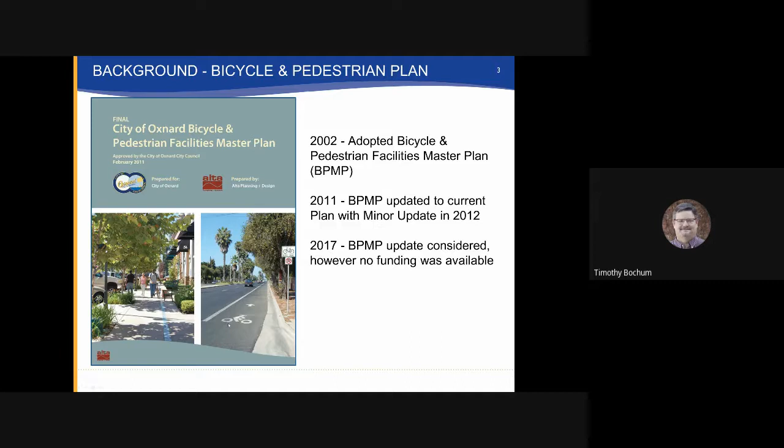The plan itself establishes a rather large objective. Here is the major goal as outlined in the plan, and that quite simply is to make bicycle and walking integral modes of our transportation system here within the city, and really do that through a safe, interconnected system of bicycle and pedestrian facilities throughout.

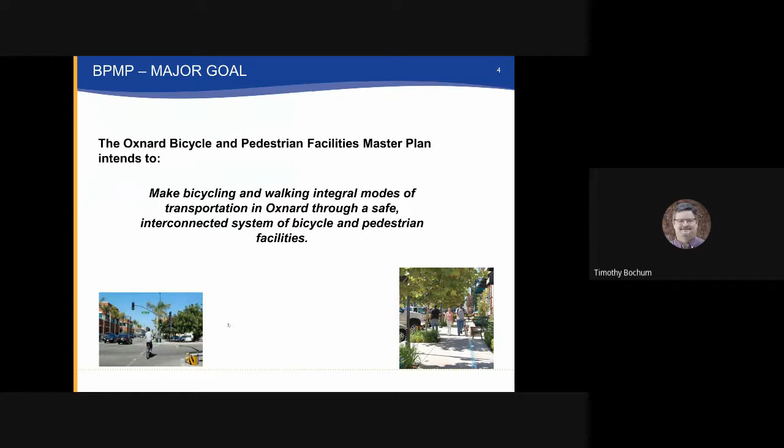How would we do that? Well, the plan does establish the following objectives. I won't read these verbatim, but I have highlighted some of the more important concepts in the objectives. Improve and expand pedestrian and bicycle facilities, generally through focusing on improved connectivity within the city. Provide more direct connections between major activity centers, such as employment and retail areas.

Improve bicycle and pedestrian access and safety. That's obviously a very important objective and goal that we need to continue to strive for. An interesting objective is to adjust our culture to recognize that bicycle and pedestrian facilities aren't just recreational facilities, aren't recreationally oriented. They need to become integral parts of our transportation system per se, and that really does mean integrating them into our street system as best we can. We'll talk a little bit about that.

And then finally, a major effort to increase our bike and pedestrian mode share for greenhouse gas emission, climate action plan advancement, as well as sustainability.

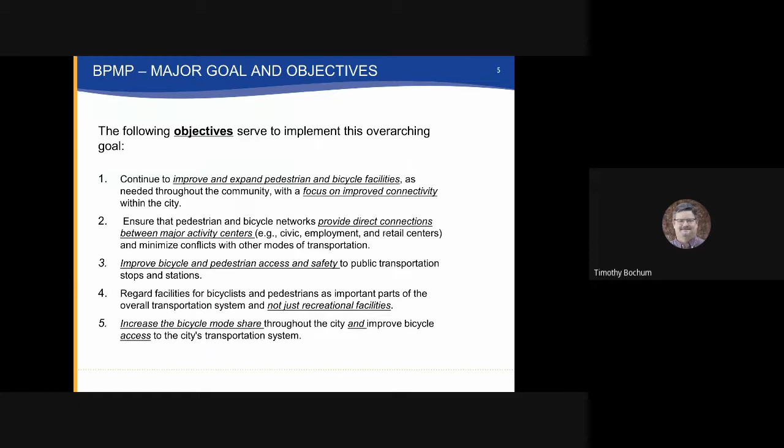Just wanted to spend a short period of time on nomenclature that you will hear in the presentation. There are various ways that we refer to various bicycle facilities. Class 1 is commonly referred to as a separate path of travel for bikes, possibly including pedestrians in a mixed-use type of path setting. They are entirely separated from roadways.

They may be along a roadway, but they're not within the roadway, giving a fully separated facility for usage by bikes and peds. Class 2 facilities, commonly referred to as bicycle lanes, use markings in a street roadway in order to establish clear areas where a bicycle should be separated from vehicles that are traveling in the vehicle right of way or parked along a street, and those are commonly referred to as bike lanes.

Class 3s are what are commonly called bicycle routes or boulevards. These are really corridors that connect various areas throughout the city that roadways may not be wide enough to provide a specific marked and separated area within the road, or enough right-of-way or public property in order to do a Class 1 facility. So we install signage and sometimes street markings in there to really connect these areas through routes and shared facilities as shown.

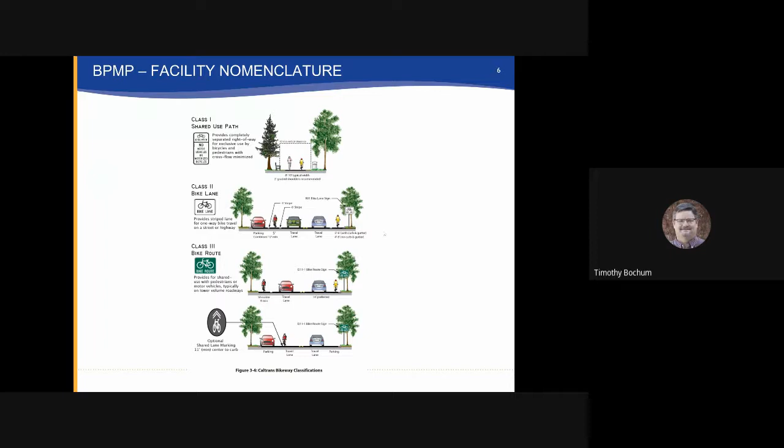The master plan also contains other elements besides just projects. Appendix A is a rather important piece of the document and includes significant design guidelines for use by city staff and others when we look at how to implement and design our bike and pedestrian facilities.

There are just two examples of those design guidelines. On the left, you'll see some examples of how to create those bicycle lanes, those Class 2 facilities. You can see in the middle that it's providing specific space for bicycle ridership, separating out parking vehicles and through traffic, giving them really defined space to make it safe.

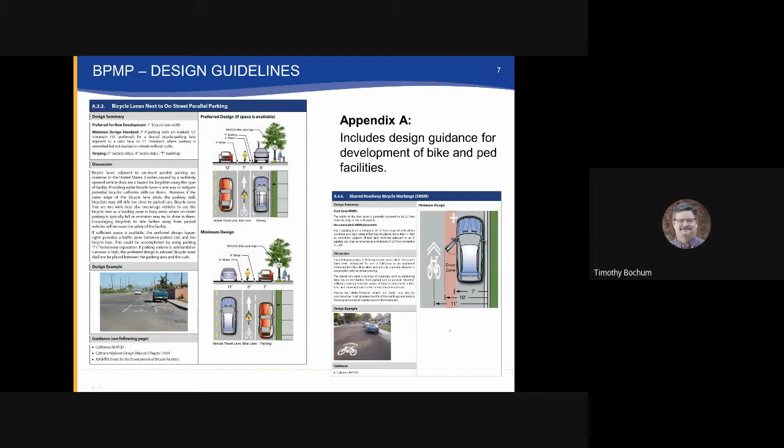On the right, a concept of sharing the road where it may not be wide enough to put those lanes in, using sharrows or other techniques to let bicyclists know where they should be, and vehicle drivers know there could be bicycles along the corridor, avoiding safety issues such as the door zone, where a parker may be opening their door and an unsuspecting bicyclist may come into conflict.

You couldn't have a bicycle master plan without having projects, and our plan certainly has those. We have approximately 110 linear miles identified in that plan. You can see in the lower left the legend identifies both existing and proposed facilities for each of those classes, Class 1 through 3.

And whether they're solid or dashed indicates if they were in existence or proposed at the time. On the right, you'll see how it lays out, fairly equal in linear miles between the facilities. The one thing I'd comment on is many of the Class 1 paths, even though significant in miles, require significant effort to install, whereas the Class 2 bike lanes are often within existing streets and much easier and more affordable to put in.

I'll give you some examples of how we do that. All of these projects, the plan looks to prioritize based on various factors such as points of interest, schools, barriers to connectivity, shopping, and gives a listing of those priorities for consideration by the council for funding and programming.

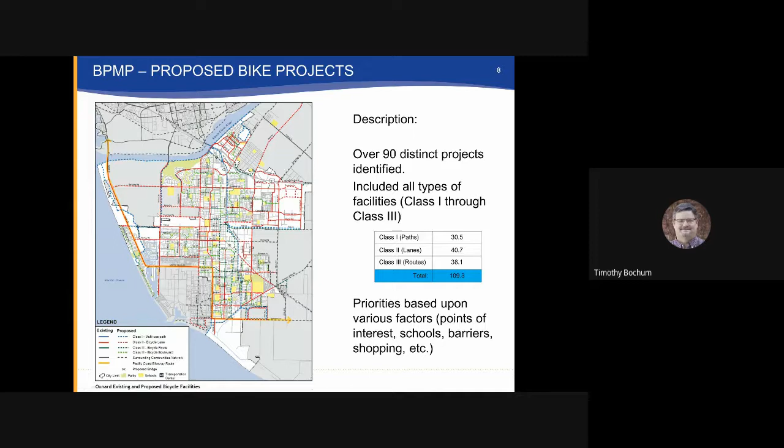Here is an example of one of the projects, pulled right from the plan. It's regarding bicycle improvements along C Street. I chose this one because we just recently completed much of these improvements. This is just one segment of the work that we did.

The plan really tried to anticipate what was necessary to improve the corridor as a complete street, a multimodal street. You can see in the upper right, their recommendations at the time were to look at shared lane markings in areas, get better route signage, bicycle signal detection, upgrading our vehicle detection to video, those type of things. Down on the left was just a concept.

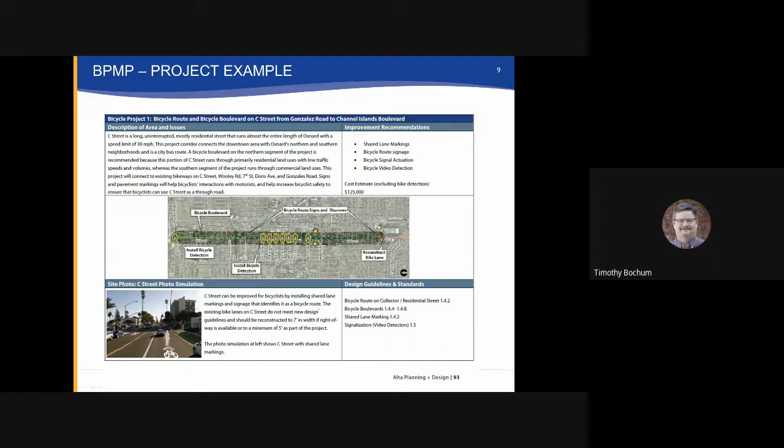Ultimately, through additional design efforts, C Street is a mixture of Class 1, Class 2, and Class 3 facilities, and it was recently completed last month—approximately 5 miles of improvements.

Victoria Avenue, the Class 1 facility completed north of Gonzales to allow access up to the Gumtree area. The Class 2 facility on Victoria that basically connected Gonzales down to Teal Club to the existing bicycle route lanes that were there, a significant corridor improvement along a major gateway to the city.

We also had other more recent projects that included bicycle facility and pedestrian facility updates. Most of these projects were related to street resurfacing projects underway or private development projects that may be coming forward.

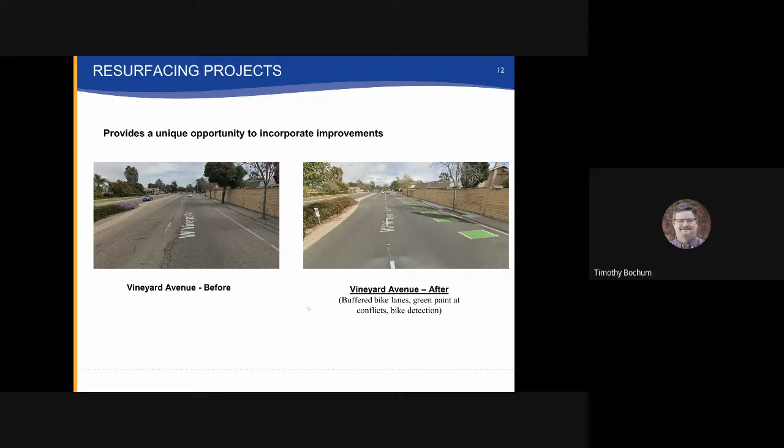Similarly, at that time on Patterson, we did a paving project. On the left, prior to our work, there were really no bike facilities on the road. We actually had signage in some areas encouraging bicyclists to get onto the sidewalk, separated from pedestrians, mostly because bicyclists didn't feel comfortable riding along the street. Post conditions, we installed full Class 2 bicycle lanes along these segments, and installed buffered areas to create separation between vehicles and bicycles, giving them specific space to operate safely along the corridor.

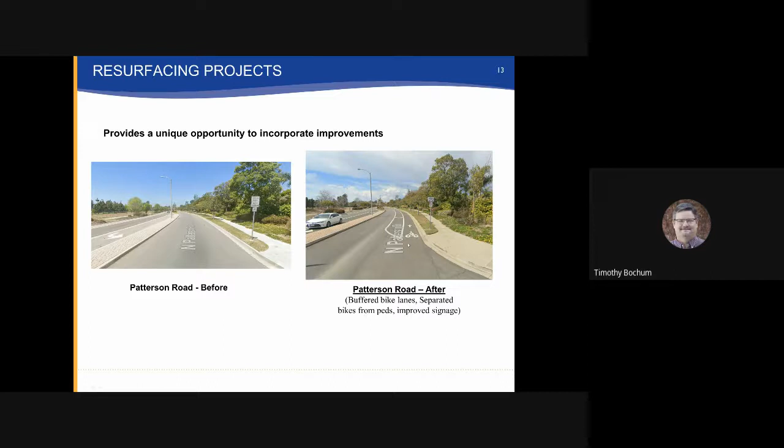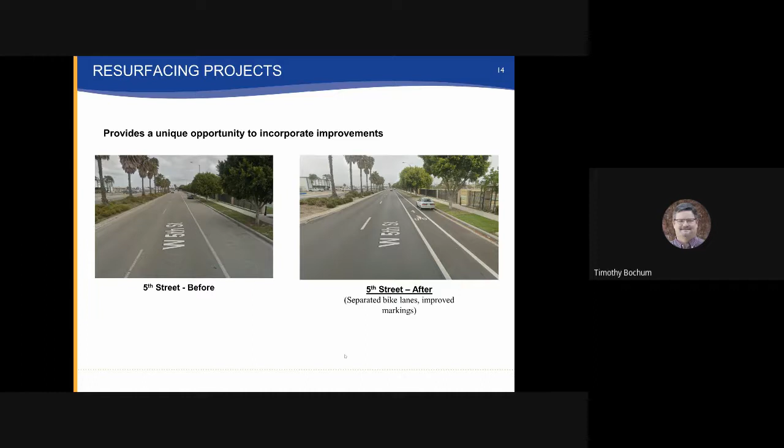One final example of how simple an upgrade can be: this is a paving project on 5th Street, looking eastbound. You can see we did have bike lanes prior, so there were areas for them to ride along the street. However, when we paved, we created additional lines to push parked cars up against the curb, giving bikes more defined space, and increased the markings to show both motorists and bicyclists where they should be to improve safety and guidance.

We obviously have a lot of projects and programs on the way. So this next part of the presentation will talk about some of the significant work that we have going on. Just a lot of work.

One of the most significant things is the recent passage of Measure E, with the council and community's investment into infrastructure improvements allowing us the opportunity to include bicycle and pedestrian improvements as part of our resurfacing and other projects. I'll talk a little bit about that.

We've been soliciting and receiving significant grant funds for other efforts, and we'll talk a little bit about those. Parallel efforts staff are working on include improving signal timings along specific corridors to improve bicycle and pedestrian safety. Then there are three major planning efforts I'll cover: the bicycle and pedestrian master plan update, our local roadway safety plan development, and our sustainable transportation plan.

This table, table 3 of your staff report, identifies some of the major resurfacing projects taking place in 2022, next calendar year. All of these facilities give us the opportunity to review them and incorporate the design features I showed in previous slides, looking at better complete streets integration, upgrading vehicle detection, bicycle detection, and similar features.

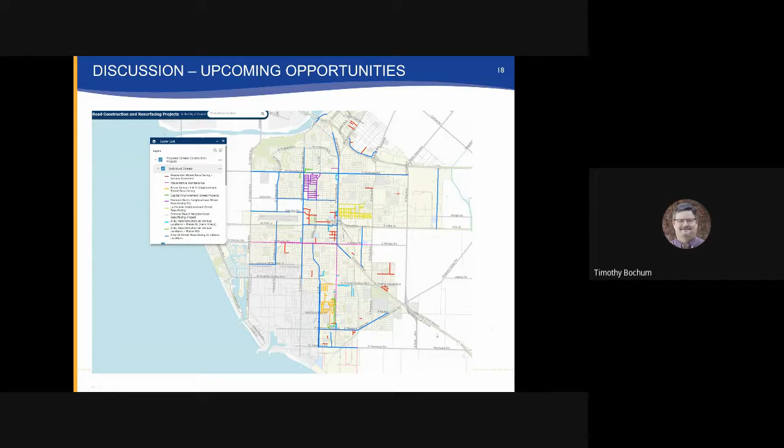I wanted to pick one example to give you an idea of what we're currently considering. Patterson Road, south of Woolley and south of 5th Street, is scheduled for resurfacing. As part of that, south of the roundabout, which is a single lane roundabout, we actually have 4 lanes of traffic. This roadway is the subject of significant complaints about speeding and pedestrian crossing issues. So we're considering making changes to make it a more complete street project, potentially by converting the 2nd lane to a buffered, separated bicycle facility.

The volumes along Patterson are such that we don't have a capacity issue out there, so we would be looking at a better way to utilize the large amount of asphalt we have. Then at intersections along that corridor, such as here at Oarfish, which has quite a few complaints, we'd get better channelization, allowing bicycle safe passage, better visibility from side streets, more defined passive travel, and other elements to implement the bicycle master plan.

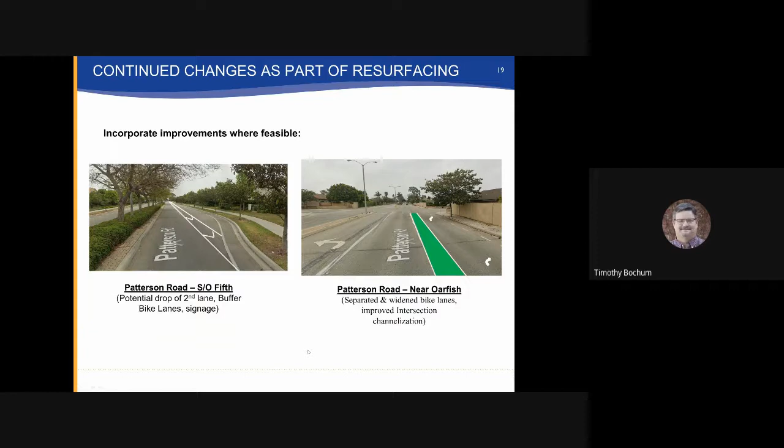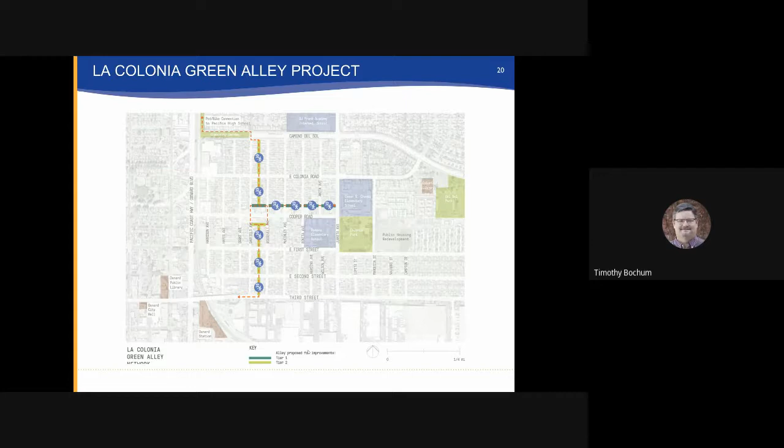A very exciting project starting construction is the La Colonia Green Alley project. This is our first green alley project of the Green Alley Master Plan, and it looks to make improvements along facilities connecting Cesar Chavez Ramona Elementary School to various areas of the neighborhood, by making modifications in the alleys and adjacent street system to clearly define and separate out some of the uses.

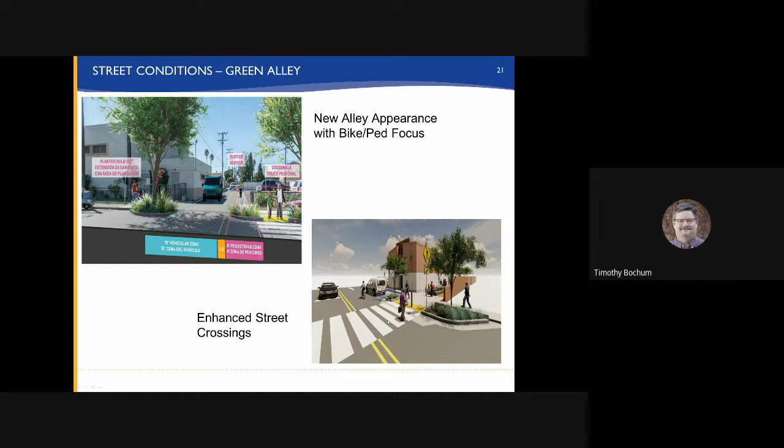These are concept figures from the Green Alley Master Plan. You can see that in each of the alleys, the concept is to separate out clear walking areas, biking and driving areas, and when we cross streets, to give better traffic calming features and enhancements for better passage for bikes and pedestrians.

This is just one example of that project - the alley that parallels Cooper, connecting Cesar Chavez here to the right into the neighborhood. As part of the project going to construction, we'll be resurfacing the alley, creating a new smooth surface, giving bicycles and cars their own one-way travel area, and area for pedestrian passage, including bulb outs and crosswalks to cross the streets.

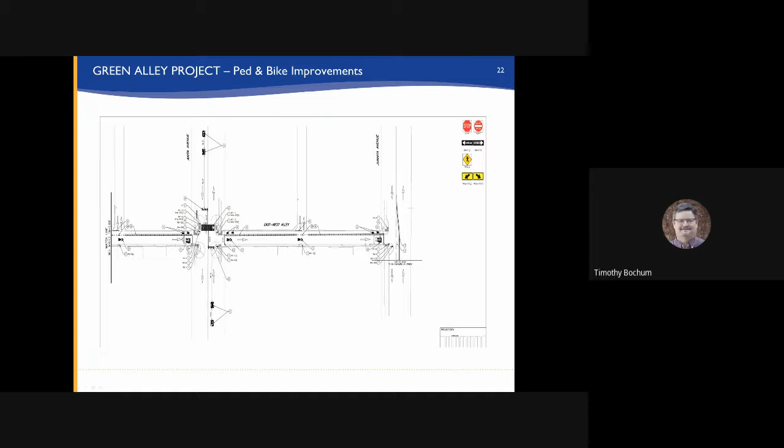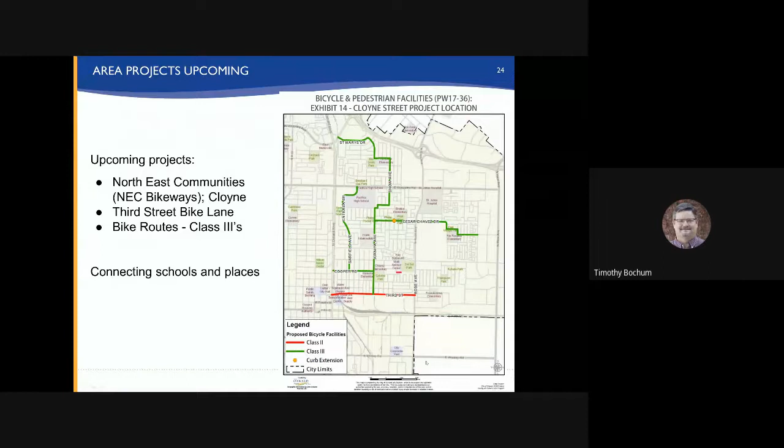One of the big ones is the Northeast Area Community Bikeway and Pedestrian Project. This figure shows how we will be utilizing bicycle routes and lanes to connect areas of the neighborhood of La Colonia and to the north. The green areas are bike routes that will be conducted through those areas, and the red is Class 2. This project is currently under design and scheduled to go to construction in 2023. As part of that, we are looking to upgrade Cooper Road.

We're making major investments in establishing a Class 2 facility from Oxnard Boulevard all the way over to Juanita. This project has received grant funding for the bicycle and pedestrian improvements, but relies on our resurfacing funding to resurface the roadway, get it smooth, and complete the improvements. This project is scheduled to be completed next year when the water project is completed.

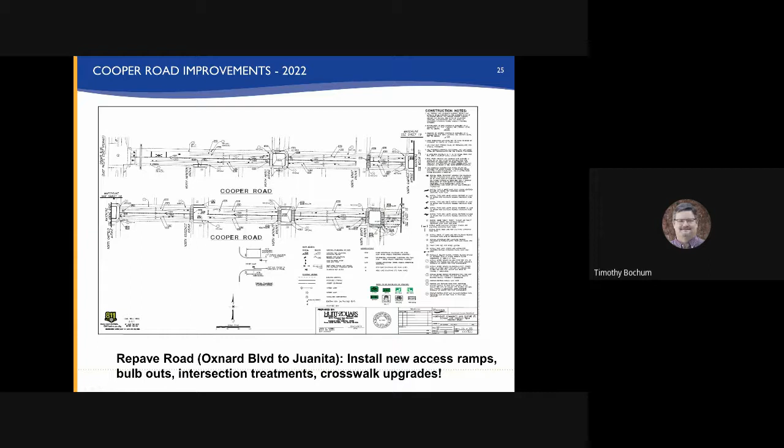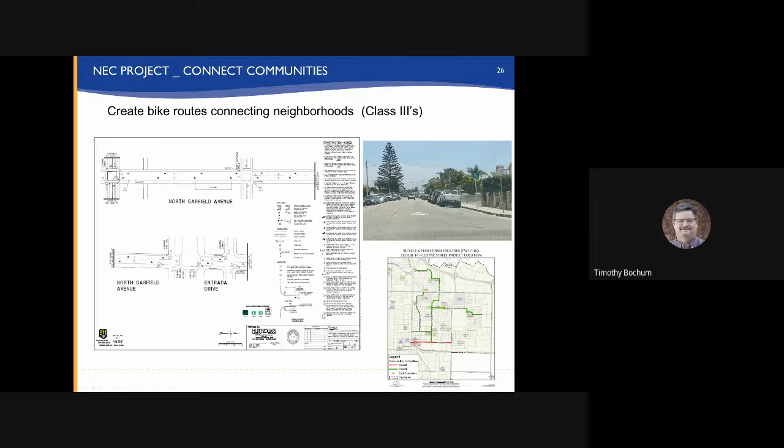A pretty big investment in trying to accomplish connectivity is looking at opportunities along 3rd Street. As you can see in the current picture, the way we currently have the area striped, we have in some sections 4 lanes of travel, in some sections 3, but currently no ability to put in bicycle lanes out there. We're looking at modifying that to get a better bicycle connection between downtown and Rose Avenue.

This is really the concept we are developing - not yet complete, but we would look at establishing buffered bike lanes up and over the 3rd Street Bridge, continuing through the neighborhood past the warehouse plants. We would have Class 2 bicycle lanes the entire section, then a mixture of 1 lane in each direction with a turn pocket, and widen the road to 2 lanes in each direction as we get closer to Rice.

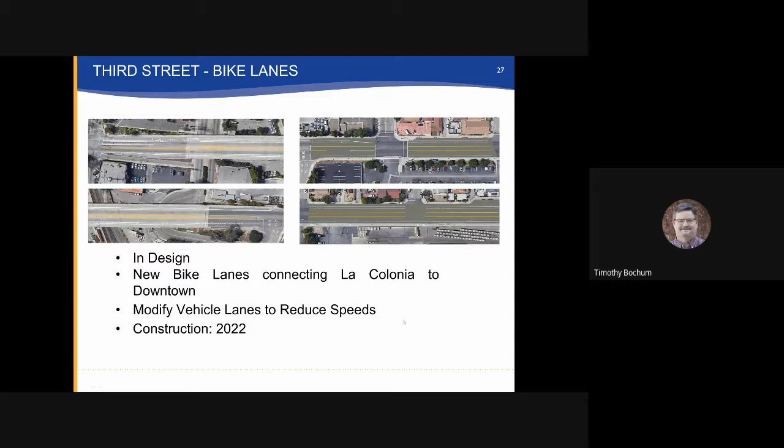A very significant award that we got recently was about $2 million, just under $2 million, for Safe Routes to School improvements. This is very exciting. It's one of the first major grants that we've gotten to really focus on our school issues. As part of that, we received funding for developing 26 plans for 26 schools.

That's by developing a plan where it clearly demarks where they should be walking and riding, and then making changes in the infrastructure to upgrade crosswalks, signage, markings, those type of things, and then promote those with school children.

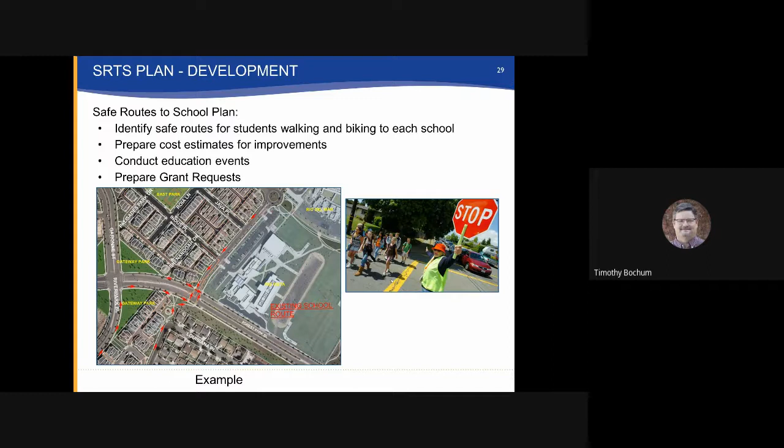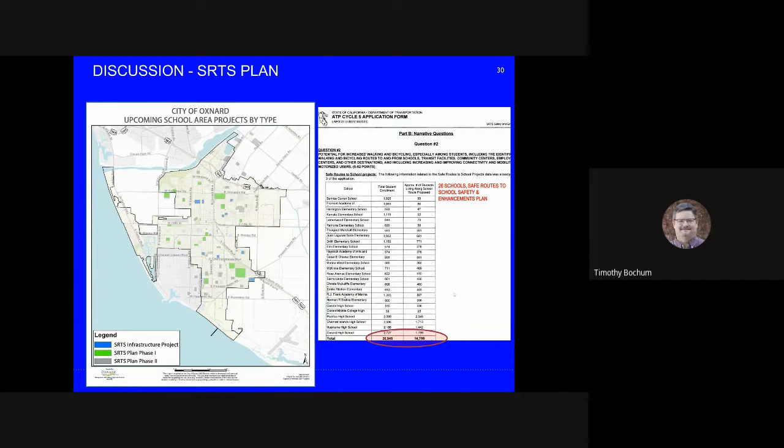One example, Ramona and Cesar Chavez. This is a concept plan that was submitted for the grant and received award. It looked at not only upgrading the traffic control along there, but also doing bulb outs and new handicap ramps, and installing rapid flashing beacons for assistance.

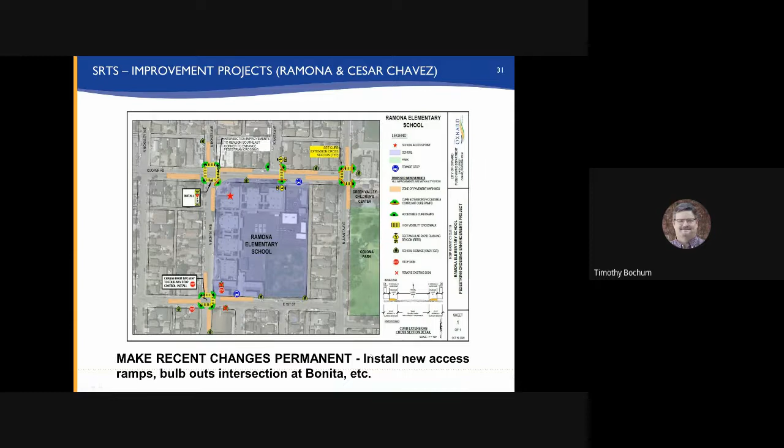This project has been funded, and it has really been funded to make permanent some of the more recent work that we just completed this summer. A shout out to our Public Works street staff who was able to complete this work.

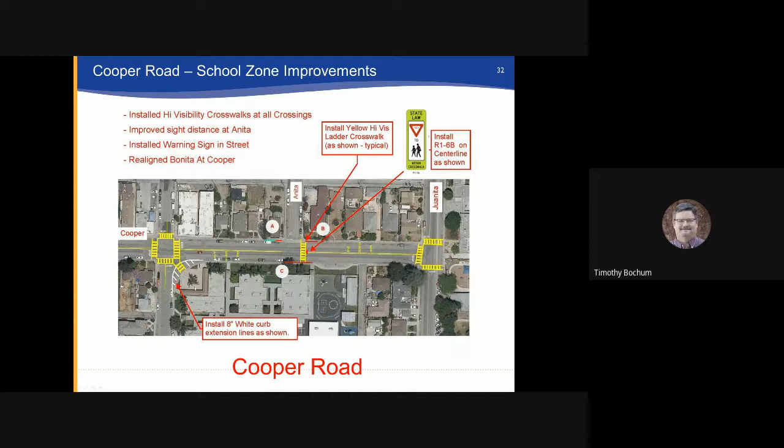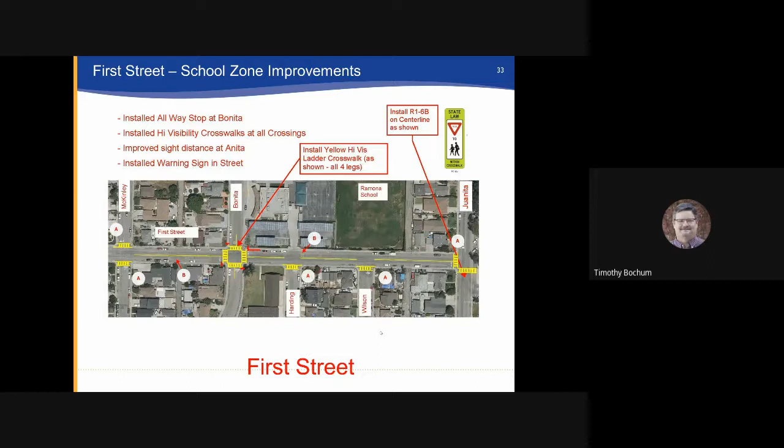We upgraded all of the crosswalks surrounding Ramona School to high visibility crosswalks, installed additional signage within the roadway, additional striping and channelization to square up the intersection. Similarly on First Street, we installed a four-way stop at that location and really demarked the corridors to and from the school. The grant project will make all that permanent and put in more permanent facilities. That is scheduled to be under design and delivered in 2022.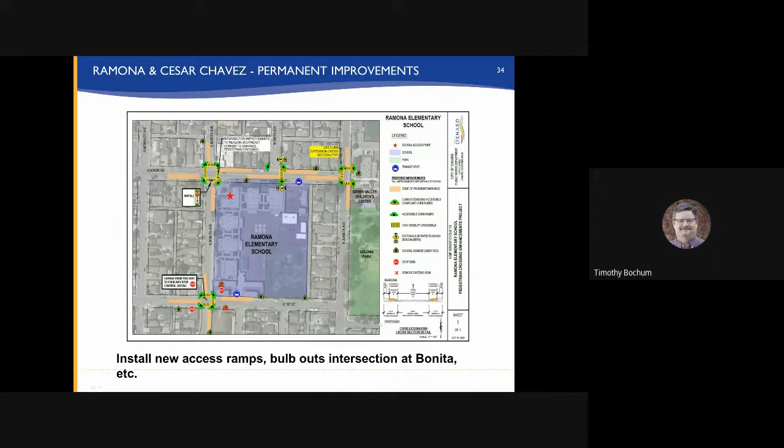4 other schools may be of interest as part of that grant: Harrington Elementary, Kamala, Lemonwood Elementary, all received funding for construction, plan development and construction, as well as Fremont Middle School. Those will all be moving forward in the next year.

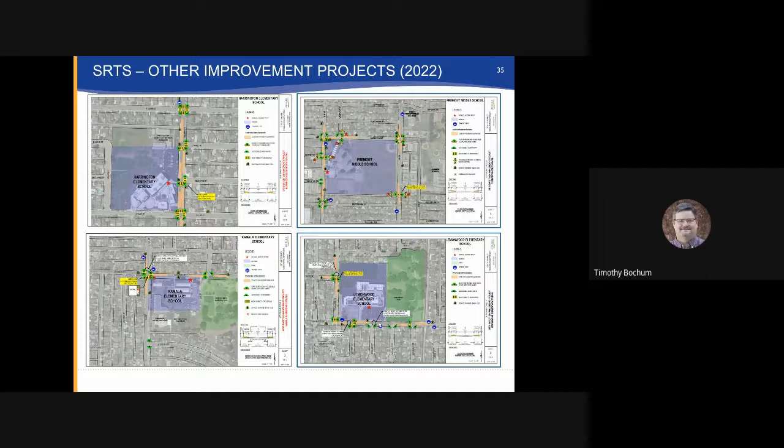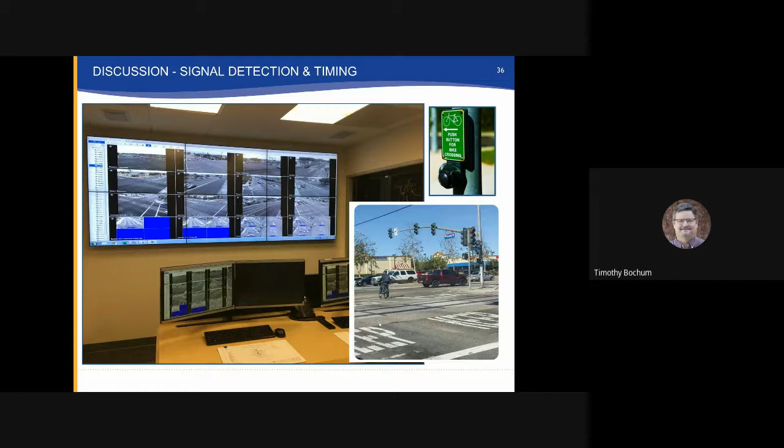As I mentioned, a parallel effort to some of our road work is our signal work. We're looking to continue to make timing improvements along our corridors and other investments for detection. Most notably, we're reviewing our pedestrian and signal timing to make sure we have appropriate clearance times and walk times for pedestrians to get through the streets. We're also looking at better ways to detect our bicycles and pedestrians.

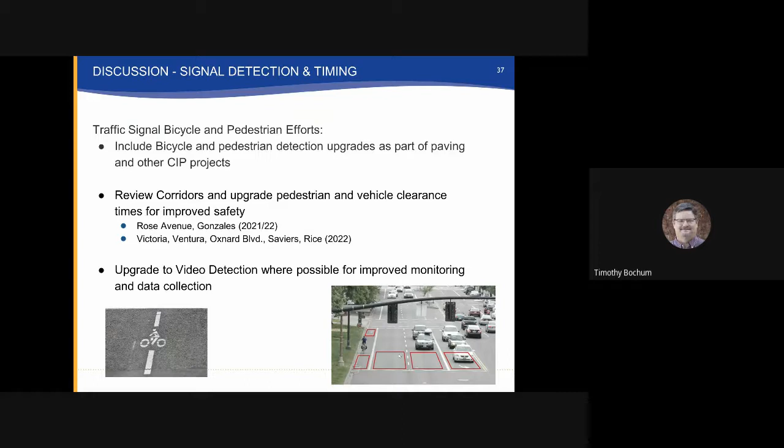On the lower right-hand side, you can see the use of what's called video detection. These are camera units that replace the need for in-ground loop detection, and they can provide better detection in certain conditions, as well as data collection and other types of things. We're breaking this project down into corridors, looking at implementing improvements along Rose and Gonzales this year and next, then moving on to other corridors in 2022 and 2023.

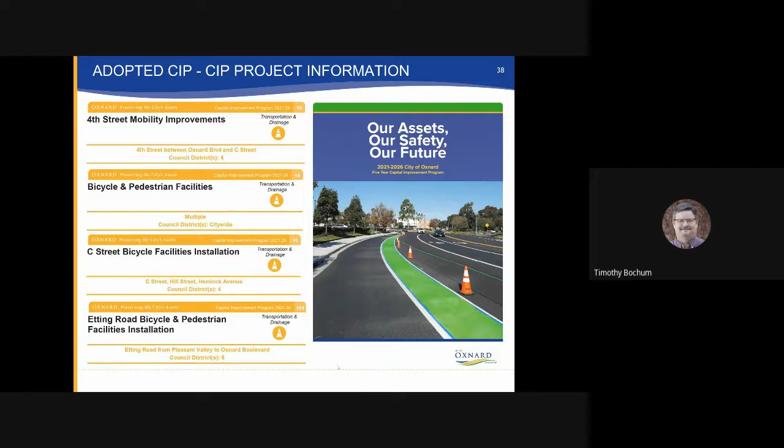If you want more information on the projects, all of that information is in our CIP document, whether it's the 4th Street mobility improvements, C Street facilities, Etting Road, or any of the ones on these slides. You can find that information in the CIP, and if you have questions, you can reach out to staff and we can respond when you'd like.

Finally, just a real quick discussion on education efforts. Education is mostly conducted by Oxnard Police Department, both with existing operational needs and efforts, as well as going out and acquiring Office of Traffic Safety grants for things such as community outreach, grants that fund rodeos and helmets, and education presentations. They do spot enforcement and distracted driver training through these efforts.

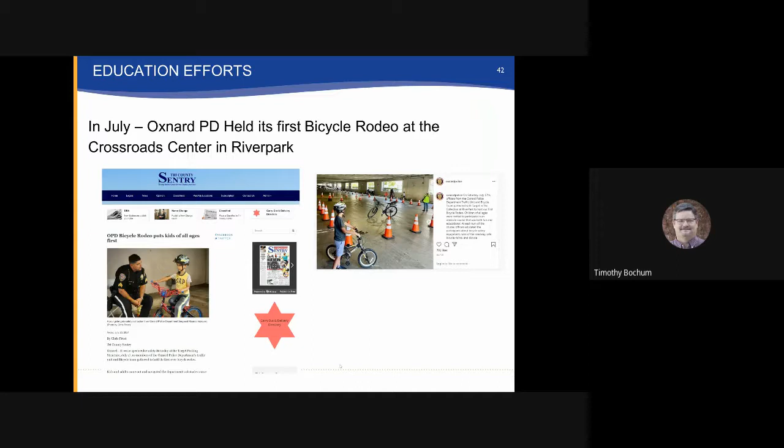One of the more exciting things is in July, we were able to hold our first major bicycle rodeo at the Crossroads Center in Riverpark. This was well attended by children, and basically police officers and other members of the community helped train them in safe riding techniques and those type of things.

Finally, I just wanted to talk about the bicycle pedestrian master plan update needs. As I mentioned previously, in 2017, we were working on a scope of work to update the plan, but we were lacking funding, so we could not move forward. Instead, we developed and went out and accessed funding for other planning efforts that will offer assistance when we get to our next bicycle and pedestrian master plan update. Those two planning efforts are really the development of our first local roadway safety plan and our first sustainable transportation plan.

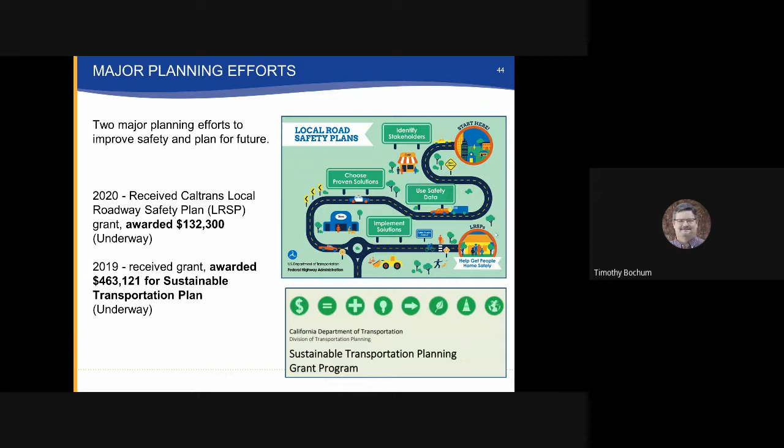These were recent grants that we received, roughly about $130,000 for our roadway safety planning effort, which has just kicked off and underway, and about $460,000, a rather large sum of money, in order to develop our sustainable transportation plan, and that's also underway. What is the local roadway safety plan?

In essence, it's a document that we use in order to identify safety along our roadways and at intersections. We do that by analyzing a certain amount of accident data and other factors. This project is looking to establish at least 5 years of clear data that we can use in order to focus our efforts, generate ideas for solutions for each one of these, and prioritize projects and locations. It really sets the stage for seeking grant funding and programming needs for the council and the community, and helps us respond better to complaints that come in and how they come in.

That document and that process is underway, and we will be seeing community presentations and workshops later this year and in 2022, with the completion of that project and that plan in 2022.

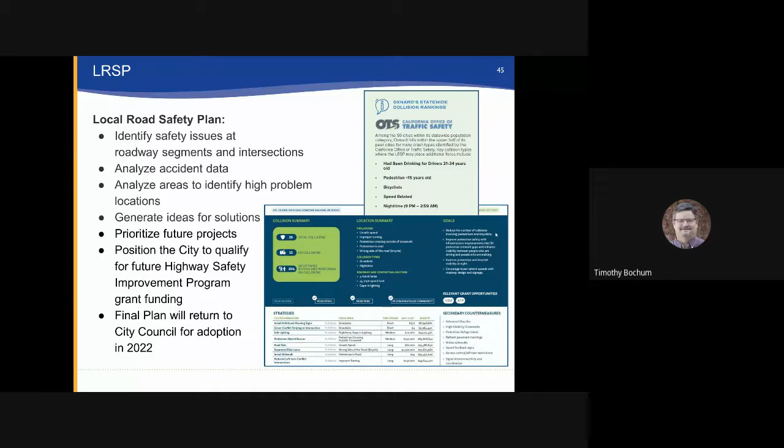The second effort is the development of the city's first sustainable transportation plan. This document basically looks to deliver a better and longer-term sustainable plan for the city, uniting various plans such as the circulation element, the bicycle master plan, climate action plan issues, connecting neighborhoods citywide, points of interest citywide, focusing on disadvantaged communities in order to remove barriers out there, and outreaching to all community members and stakeholders, rather than just focusing on bikes and peds and vehicles.

We're looking at other issues such as access and those types of things. This is all to develop a better plan in order to upload the policies and the projects into our general plan update, which is scheduled to kick off in 2022 and 2023.

This project, as I said, is underway, and we will be having community workshops later this year and in early 2022. It's scheduled for a longer completion timeline, but ultimately up for council consideration, final consideration sometime in early 2023.

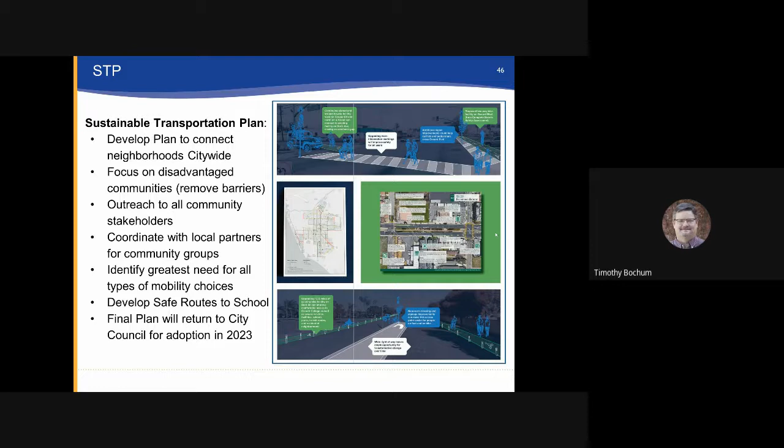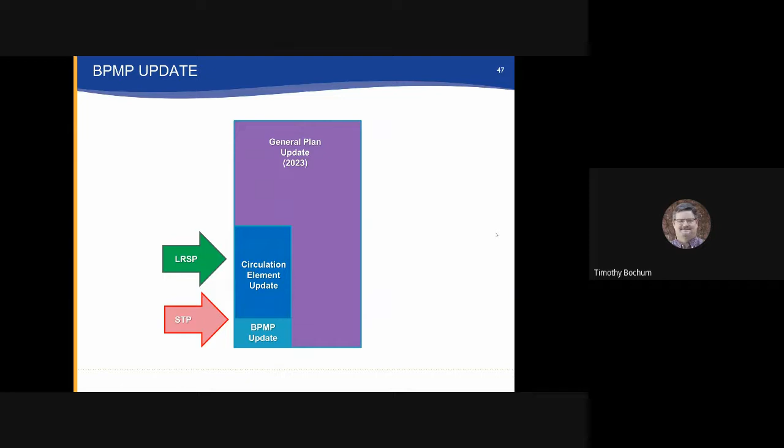So what are the next steps? Council and the community can offer input at any time on the bicycle and pedestrian master plan or any of the various CIPs that the city is bringing forward. As I've mentioned, the local road safety plan and STP are currently underway with major efforts occurring, so stay tuned for those. The safe routes to school efforts and other issues are being kicked off later this year and in early 2022, with the anticipated completion of the construction components dating up to 2023 and 2024.

And then, of course, all of the projects that are in the tables and the CIP, we're continuing to design, bid, and construct those at various stages and timeframes.

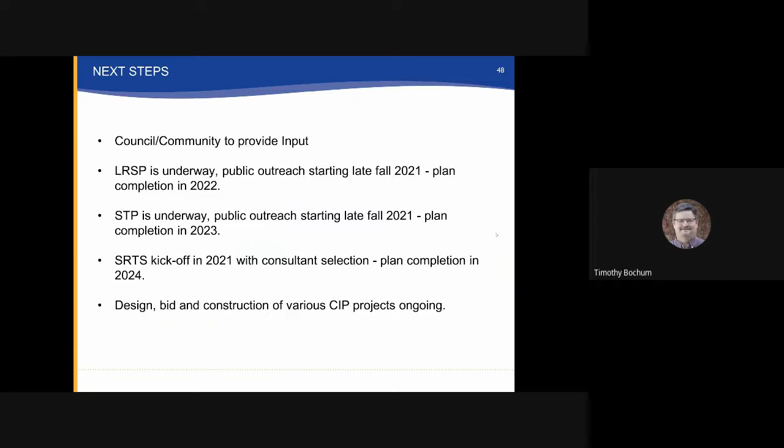Financial impacts: there's no direct financial impact of the bicycle master plan. It does include, obviously, significant financial investments into infrastructure and programs for the city, but there's no direct financial impact of receiving this update or anything associated with that. Rather, it's a continued effort of funding by the council through various funding sources as well as grants in order to deliver those projects and programs.

That completes the presentation. I appreciate your consideration, and we are available to answer any questions.